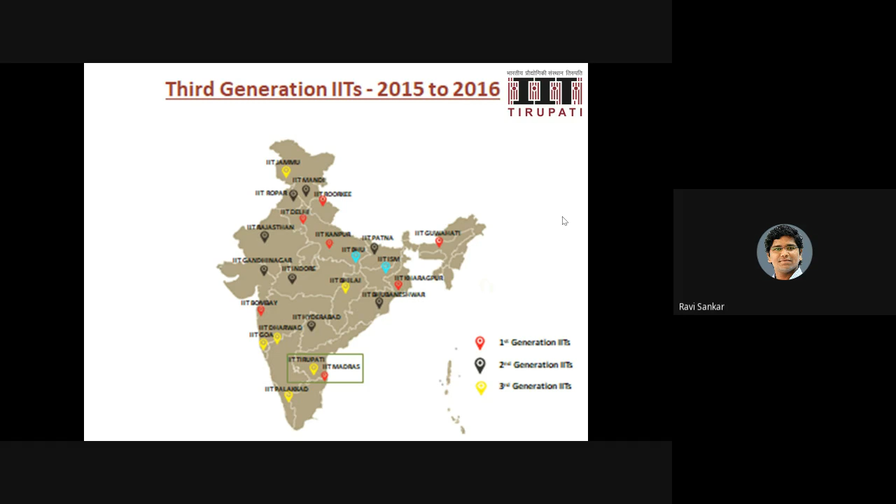Regarding the history and milestones of IIT Tirupati, the announcement of third generation IITs was given in 2014, and we started working from 2015. However, some of the third generation IITs started from 2016. So we are very fast, and we are growing very fast compared to even some of the second generation IITs.

What is the scale bar for it? For example, we now have nearly 100 faculty at IIT Tirupati, and we have approximately 75 to 80 projects. That shows the ratio of number of projects to faculty. If you take some other institutions, this ratio may be slightly less.

IIT Tirupati is mentored by IIT Madras, and IIT Madras follows MTech and MS. As you know, all IITs have BTech, MTech, and PhD. Apart from these, we also have MS by research, so those people who are interested in doing research can also enroll into the MS.

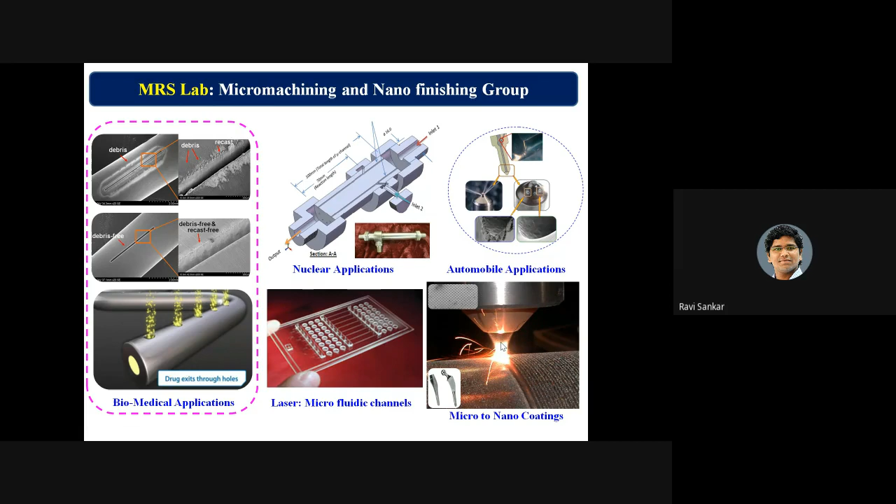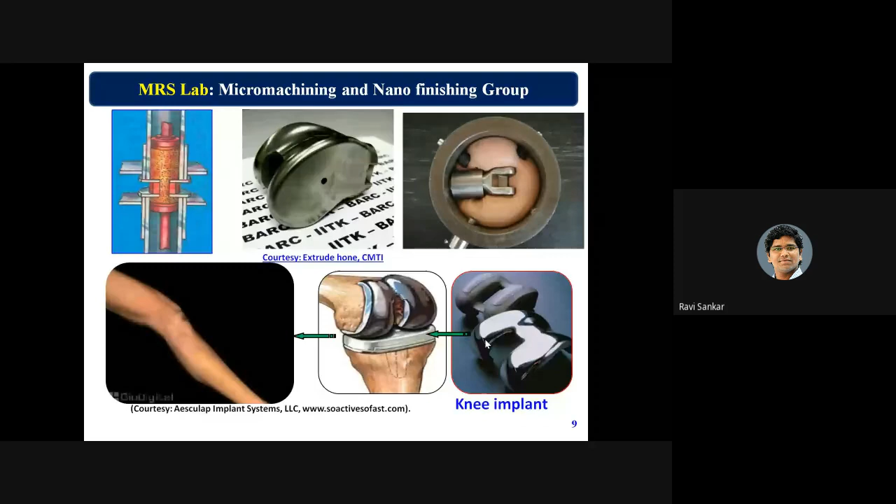I'm not going to talk much about finishing because my next lecture will cover finishing. These are some of the extra slides I'll explain in the next lecture.

Sustainable manufacturing group - let me give you a glimpse of what we do. The first glimpse shows how machining takes place conventionally. This is the one I started my research on - sustainable manufacturing, which I began in 2002 when I joined IIT Kanpur, approximately 20 years back. You can see the great potential it has.

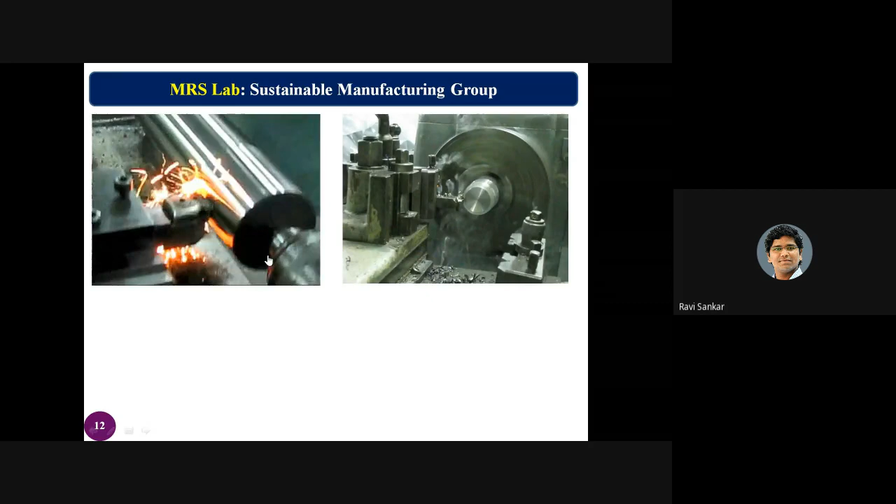So this is one of the problems - normally in colleges, people talk about thermal aspects of machining and the high temperatures generated during the machining process. To overcome these thermal aspects, there are two solutions. One solution people normally talk about is going for diamond cutting tools or ultra hard cutting tools, which is an expensive process for a country like India, because we always have to consider the economy.

For example, whenever we try to go to the shop to get a car or a bike or something, the first and foremost, the common man mentality, I can say that you just observe how much mileage it will give. So you don't look at what the safety features are. Nowadays, people are slightly more aware of other things.

In the past, or you can say still currently, some people think about how much mileage, because that is clearly evident from the advertisements in the newspaper. For example, they will write clearly, this particular car will give you 20 kilometers per liter. Why are they writing that? Because people want it. The people want to observe it.

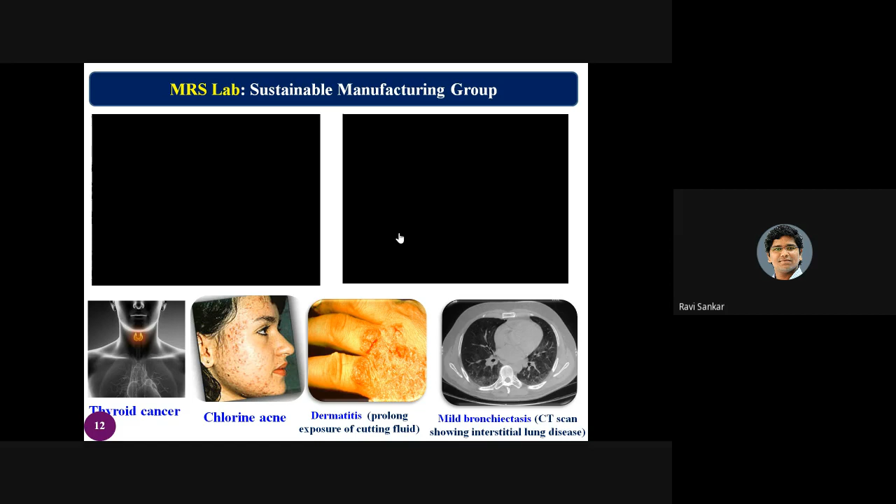So what are the diseases that will be caused? Chloracne, dermatitis, mild bronchiectasis, and other things. These are many things that it will cause. So what you have to understand here is what's needed.

What is the solution that our laboratory will provide? Our laboratory has multiple solutions. Currently, we try to do green cutting fluids and at the same time minimum quantity cutting fluid, as you all know. So we have different types of minimum quantity cutting fluids. Some of the things we develop on our own, some of the things which we can procure from abroad also.

And the most important thing that we try to do is develop sustainable cutting tools, and we also try to develop sustainable compositions for green cutting fluids. So we also provide services.

As you see, we also provide services, meaning some people nowadays slowly send requests through the proper channel only. The request is, sir, can we get cutting fluids? It is all about patented technologies and other things. We are ready to supply to the people. We don't have issues, because some mails are coming from some universities in Andhra Pradesh and other states also. So what I mean to say is that we are ready to supply, but through the proper channel. We have to take appropriate permissions from our institute, and we can supply to you also.

Because people want SCI publications and other things, what they think is that if they may have chances to get the green cutting fluids, they can understand the emissions and other things, and we can also provide some data. For example, what this cutting fluid emits and other things also. So people try to approach us officially as well.

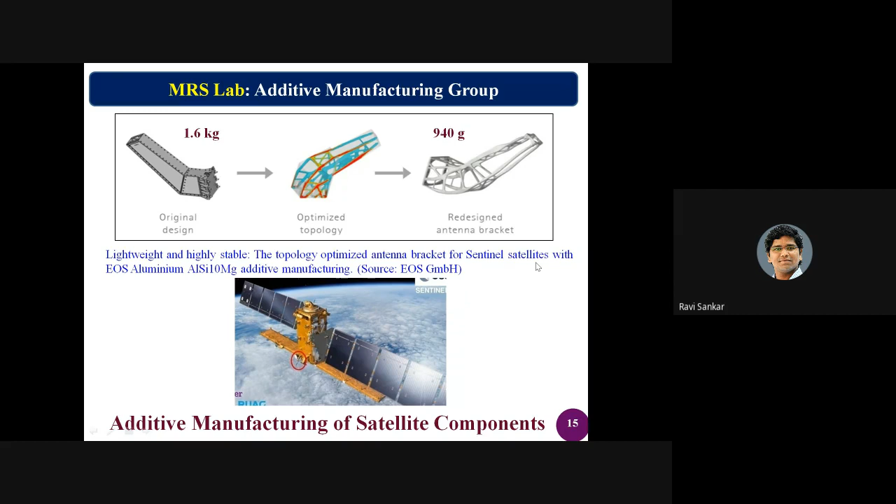Your 3D printing should not work if you haven't checked what is a viable solution. Whenever you want to get some components 3D printed, these are very expensive. A simple plate, 10 centimeter by 10 centimeter, the minimum charge will be 10,000 rupees. The same thing by normal conventional manufacturing route, you can get for 1,000 rupees. So you have to wisely decide which components you should make by additive manufacturing.

Second example is hydraulic manifolds. These have holes from all directions that must merge at certain positions and angles. This is very tricky because all the holes are internally joined, as you can see in the wireframe model, joined at different junctions and angles. Drilling the sides is not a problem, but joining at different angles like 45, 50, 70, 90 degrees is nearly impossible to fabricate conventionally. In that case, you can go for topological optimization based on functional requirements and develop a 3D printed component.

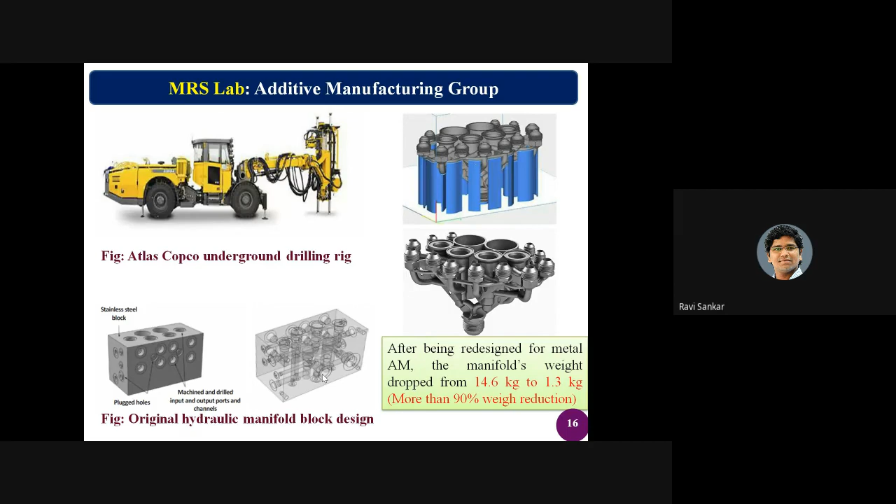A common hydraulic manifold will cost you around a few lakhs of rupees. With 3D printing, the burden on materials is reduced and the cost is also reduced. So you need to find solutions where you employ additive manufacturing.

One example: you can 3D print two structures, one solid and one a lattice structure. Why go for lattice structures? With lattice structures you can minimize material wastage. Both can be printed by 3D printing technologies. People are nowadays working on lattice structures, especially my group. There are a few PhD students working on lattice structures for biomedical applications, automobile applications, and many more.

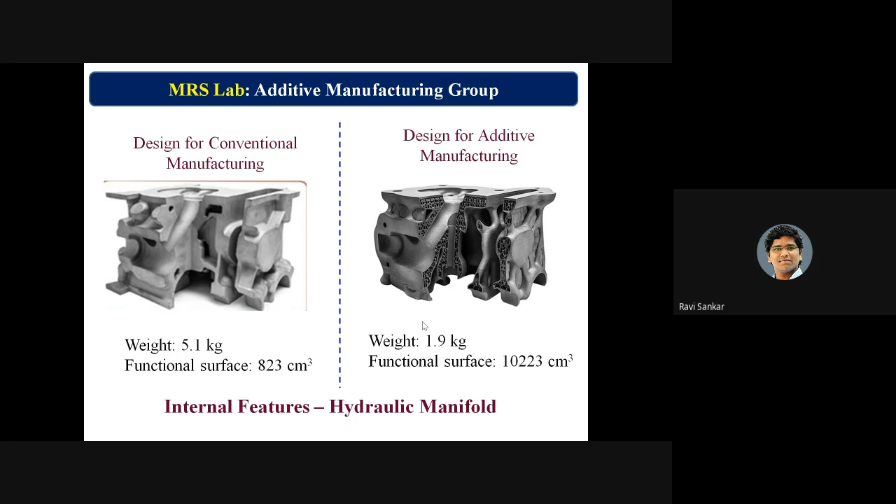Why do you want to save material? Because you have to save material for your children, grandchildren, and great grandchildren who will come after you and need materials to sustain. That's why sustainable manufacturing plays a crucial role in additive manufacturing also.

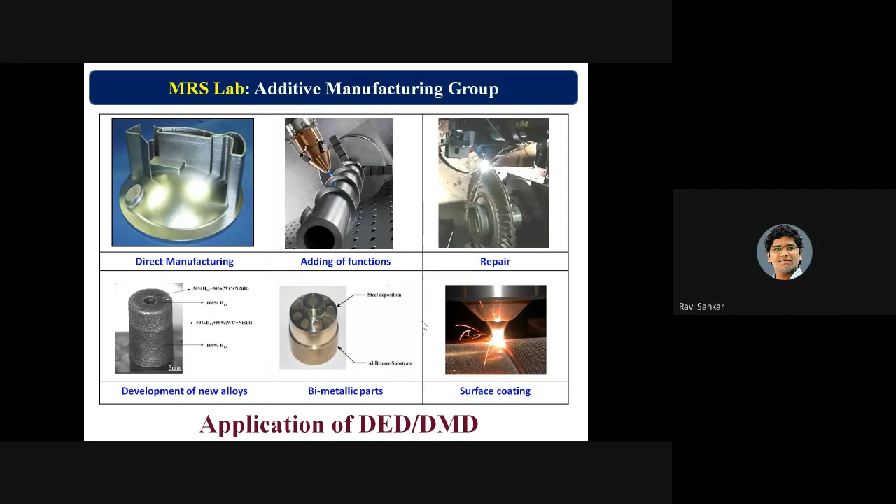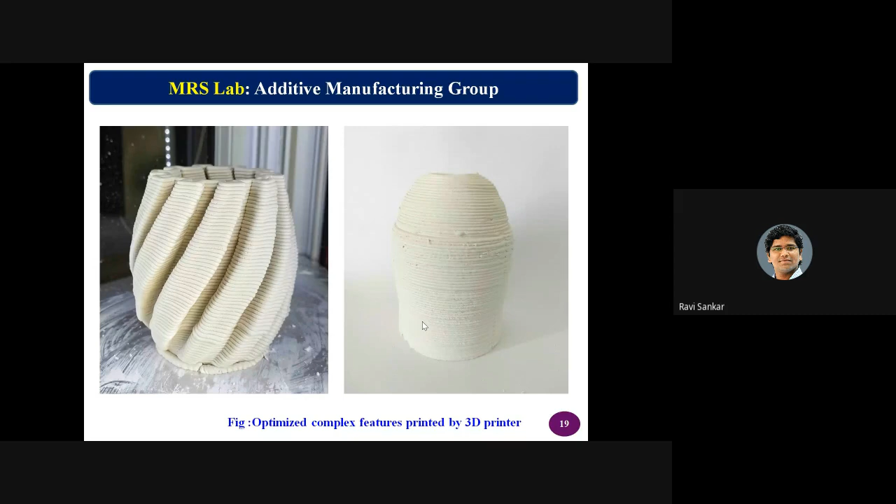Our collaborators and students who are working have all these types of facilities. Powder bed system, direct metal deposition, and other systems are there. We also have a process called ceramic 3D printing. You can see some beautiful structures we try to build using this. The only question is what type of ceramics can be used. Beautiful structures can be fabricated by ceramic 3D printing technologies at our laboratory.

If you want any support or anything, at this point of time we are not providing any other solutions.

One minute, I'm just getting an official call. Hello.

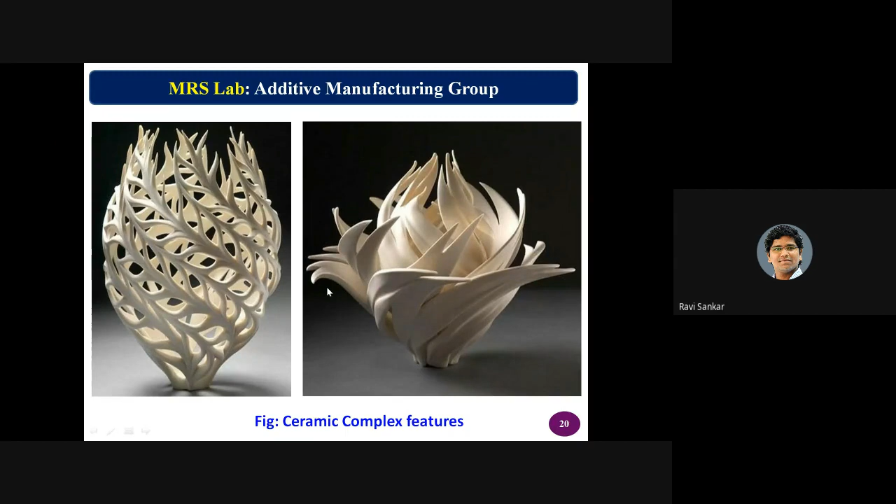So these type of structures we tried today. Now we are entering the area we're going to talk about today: the bio-nanomaterials and manufacturing group. We exclusively work on materials development as well as coating technologies, how these coating technologies work for us, and if not working, how we can overcome the problems and other things.

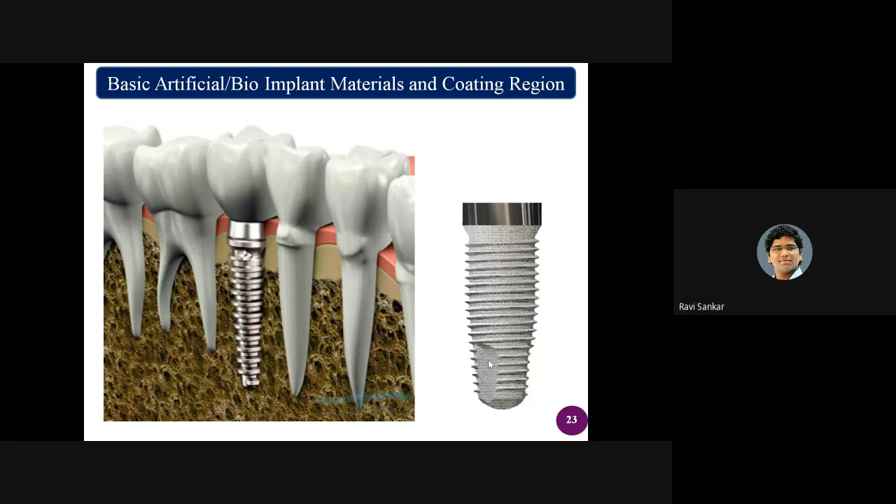So what people try to do is the coatings. These coatings help in osteoconduction as well as osteointegration. So what are these osteoconduction and osteointegration? If you understand the basics of these, then you can do proper coating. For this, you need to go for a porous coating. How do porous coatings look like?

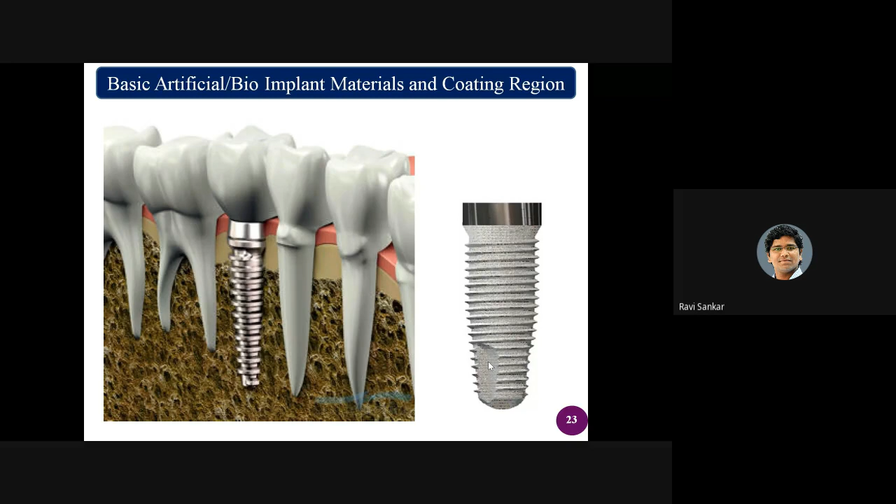For example, whenever implantation is going on into the mouth, first they drill it, then they try to rotate it, so it experiences the tribology, or shear force on top of it. Once you place it, as I was telling in the previous slide, you should have the conductivity of body fluids and bone generation and other things.

It has to conduct through the coating surface, that is called osteoconductivity. Osteoconductivity is the protein exchange, the mineral exchange taking place across the coatings. During this course of time, you need some layer development on top of it. These intermediate layers will integrate the bone and the coating surface together, that is called osteointegration.

For which, how the coatings look like, you just see here. The coatings look like this. You should have a solid coating, an interacting coating, and as you grow across the coating, it has to open up, because it has to have as many pores as possible. Once you have the coatings with high amount of...

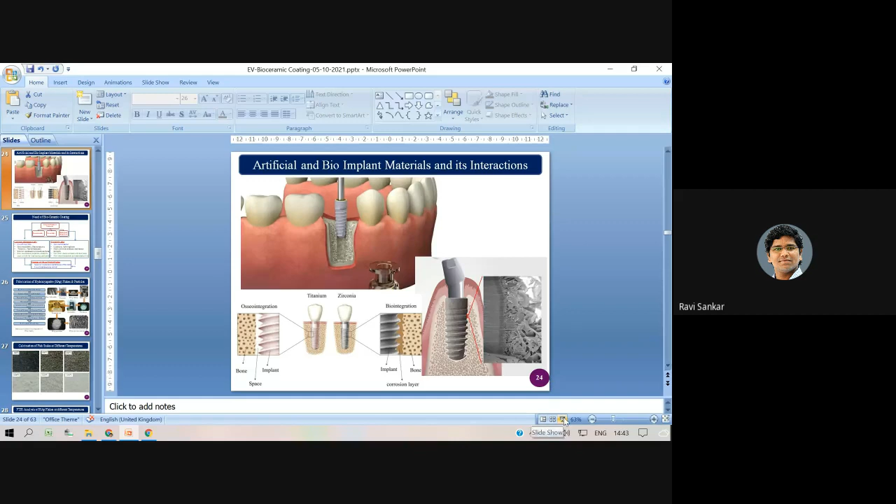So osteointegration, as I said, whenever you have a porous type structure, fluids pass through this. Whenever fluids pass through, it has to generate a third layer, that is the integral part of the mineral layer, protein layer, and vitamin layer, whatever the layers are. These layers are called, in osteo terms, the apatite layer. Those layers will form on this and join the body along with the crown. This is called osteointegration, so for osteointegration, the best choice is proper osteoconductivity.

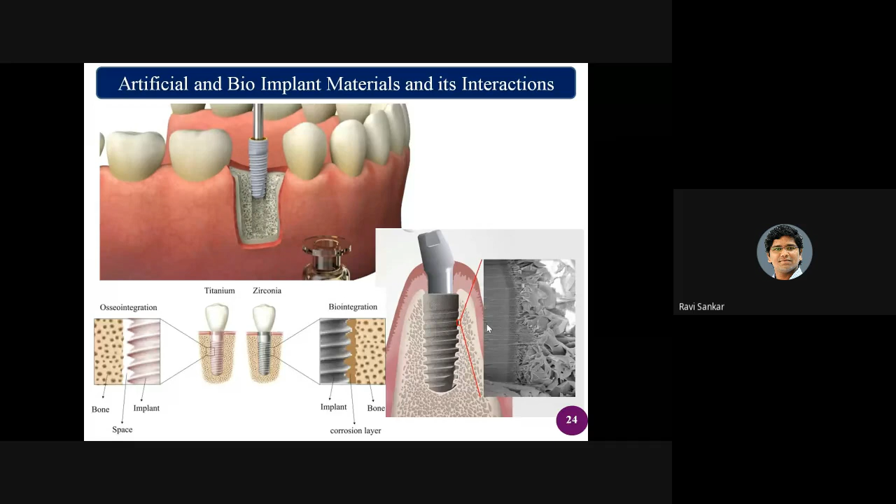Some people also use zirconia based implants and other things. Now we move on.

First and foremost, whenever you want to coat, what do you want to coat and why do you want to coat? Is your coating material good? That question comes next. So what do I want to coat? I want to coat calcium phosphate. For example, your bones, dental implants and other things, everything will have calcium and phosphate. This calcium phosphate is Ca10(PO4)6(OH)2, that is hydroxyapatite, which is one of the bone materials, or artificial bone material.

Now I want to coat this. You may have a doubt, why sir, why do you want to coat? Directly you can make an implant. The basic problem is it has poor mechanical properties and other things.

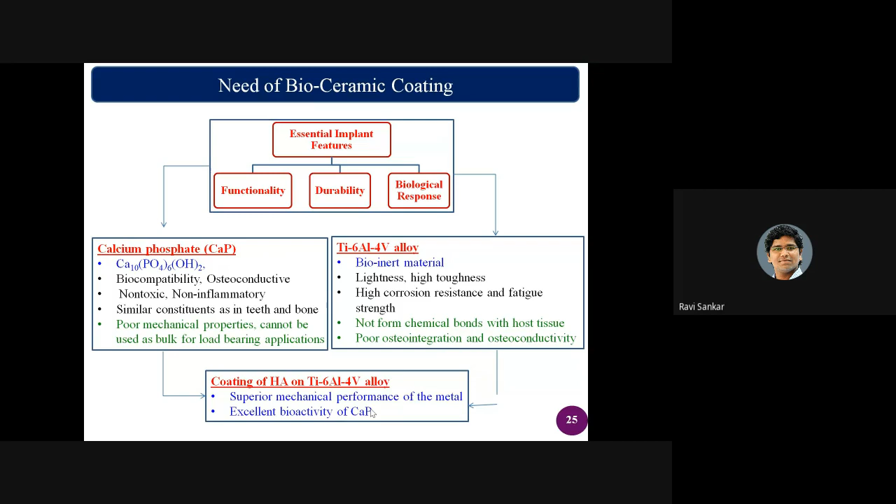Okay, so now the question comes whether the material that I'm developing is good or not. So for that purpose, how do you fabricate the bioactive glass or hydroxyapatite, or the biomaterial that you are talking about.

Since this particular work started in 2012, at that time I was in IIT Guwahati. IIT Guwahati comes in the region of Northeast, where people take an abundant amount of fish. So fish scales are abundantly available and free of cost. So we can take the fish scales.

Fish scales contain an abundant amount of calcium and phosphate. In that circumstance, what we try to do is extract that. Fish scales also contain some protein, but that protein is entirely different from what humans require. That's why you need to do deproteinization, or remove the proteins and other things.

That's why what we have done is acidic deproteinization followed by basic deproteinization, then we have gone for the calcination process. Once you do the calcination process, you get flakes of hydroxyapatite. Then you can go for ball milling applications and get the particle size as per your requirement. If you are looking at normal, small institute level, up to microparticles is okay.

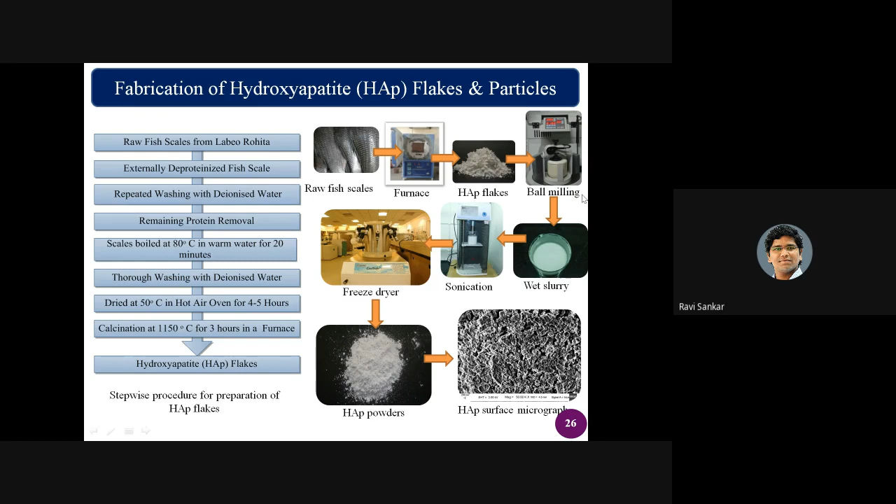So once you get that, you need to start characterizing whether you received a good material from the manufacturing process or a production process or not. That is a million dollar question to ask about.

For example, if you are calcinating at 700 degrees - so what we have done is we have done from 700 degrees to 1400 degrees. Since we have less space, we are showing you only some here.

From the images, it is very difficult to predict whether this material is good or not - just for your qualitative understanding, we are not telling you quantitatively, we just wish to tell you which is good or which is not good. For example, if you see 700 and 800, you need not do high level characterizations like XRD, FTIR and other things, because by default from the visual inspection itself, you can understand that this is not good, obviously. So you can avoid some of the things.

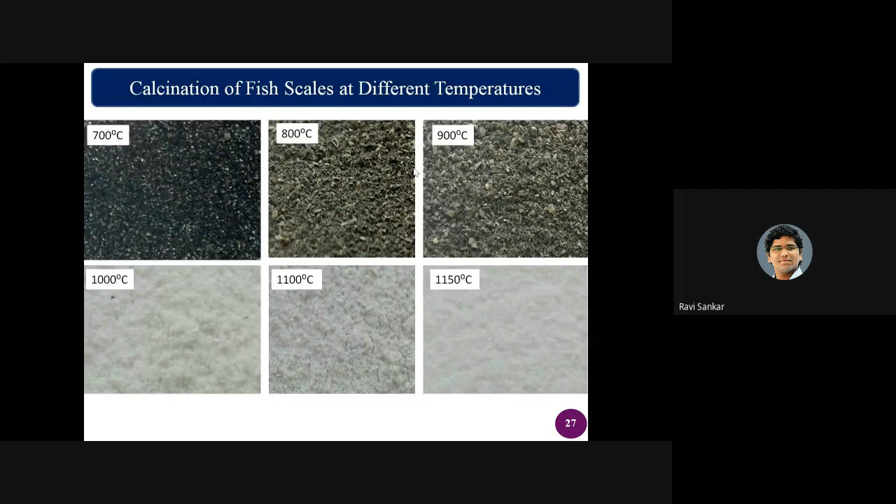For example, the first and foremost thing you can do is go for FTIR analysis, Fourier transform infrared spectroscopy - it is one of the IR technologies. So for FTIR, one curve, I am just going to explain at 1250 degrees. As you can see here, a lot of things are there where you can see OH bonds, PO bonds, and CO bonds - calcium, phosphate, and OH bonds and other things are predominantly available.

Now, we are going to do this at different temperatures, for example, 800 degrees to 1400 degrees.

So it will show you what are the compositions and bonds available in the materials. This is one type of characterization to understand whether the material has proper bonds, whether PO bonds are there, so phosphate is there, calcium is there or not, and other things.

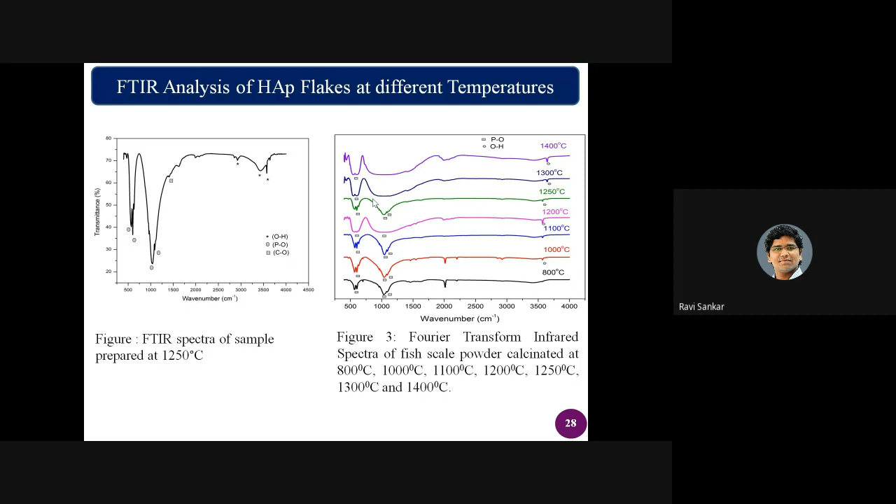Apart from it, you also have to go for XRD analysis, where you can see different 2 thetas. You all know Bragg's law, n lambda equal to 2d sine theta, where 2 theta will be on the x-axis, and it will give you some of the Bragg's peaks and other things, where you can see tetracalcium phosphate, beta tricalcium phosphate, and other things at different positions.

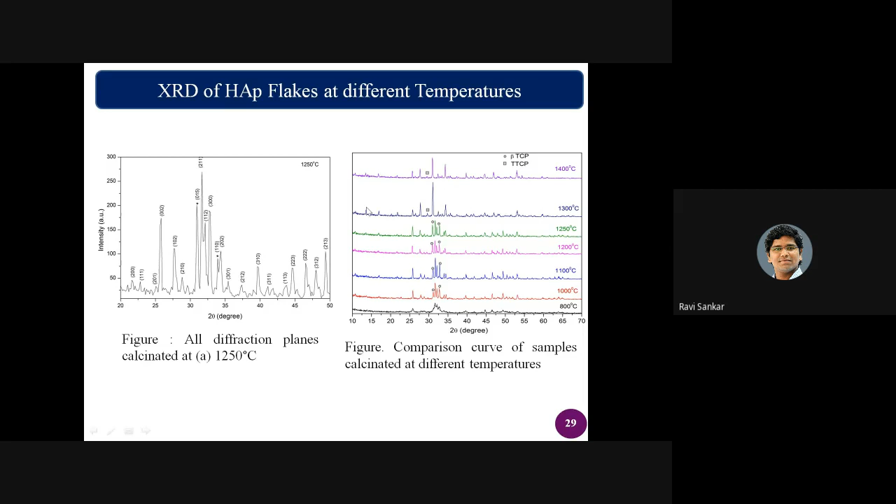So once you understand these two, you also have to understand in terms of ball milling time. Whatever you are doing from a fish scale after making hydroxyapatite, you need to do ball milling with respect to number of time. If you are doing a ball milling operation, there will be contamination because balls are there, bowls are there and other things.

So you need to do it again with respect to different ball milling time, like 2 hours to 9 hours, and at the same time XRD also. Now you have a big data set. I have powders, so these powders have this type of characterization and other things.

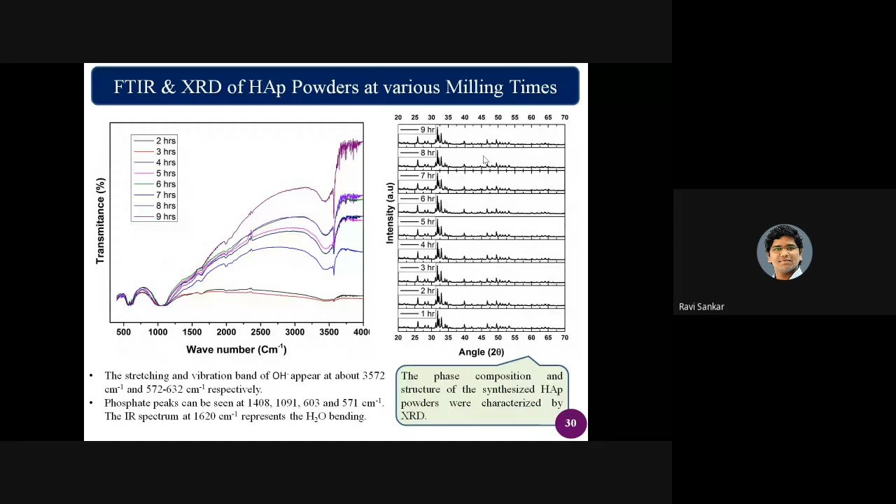Now, which is good for me, whether the 2 hours is good or calcination temperature 1150 is good - that is what you need to understand. So in our case, normally what we got is 1250 and 1200 approximately gave the good results.

Once we got the good results, we have to understand the purity of the material. For example, if I want to understand the purity of the material, there is a standard pattern you can use, which is JCPDS in the XRD library.

For JCPDS, you will have a standard curve. For example, for hydroxyapatite, you will have a standard curve. On the standard curve, you need to superimpose your data. So for example, my 1250 degrees, which is giving me good results, I am superimposing.

So whatever the blue one that we got is from our material. Once you remove the base, you try to superimpose this. So you have two methods.

One is the peak intensity method, from which you can guess qualitatively what is the purity of the material, whether it is 99% pure, or whether it is 90% pure, or 60% pure or something. Since it is a biomaterial, you should always try to make it 99.2 or 99.5 and above.

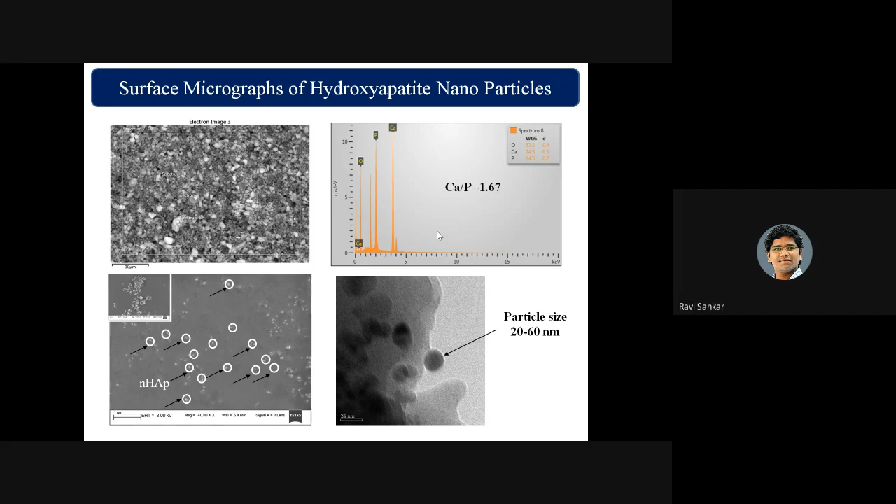As you go towards the nano scale, what is the advantage you get? Your surface area will increase. At the same time, whenever you go for nanoparticles, from 360 down to 20 to 60 or something, the calcium to phosphate ratio is slightly better. I can say 1.67 is normally what a healthy human will have. So we are on par with respect to purity as well as the quality of the materials.

We used to have one professor, Professor Rajendran. He used to tell us, if you have wheat flour, you can make chapati, puri, dosa, whatever you want, samosa, chilla, or anything, pakodi also you can make. So now I have a recipe with us, so I can play.

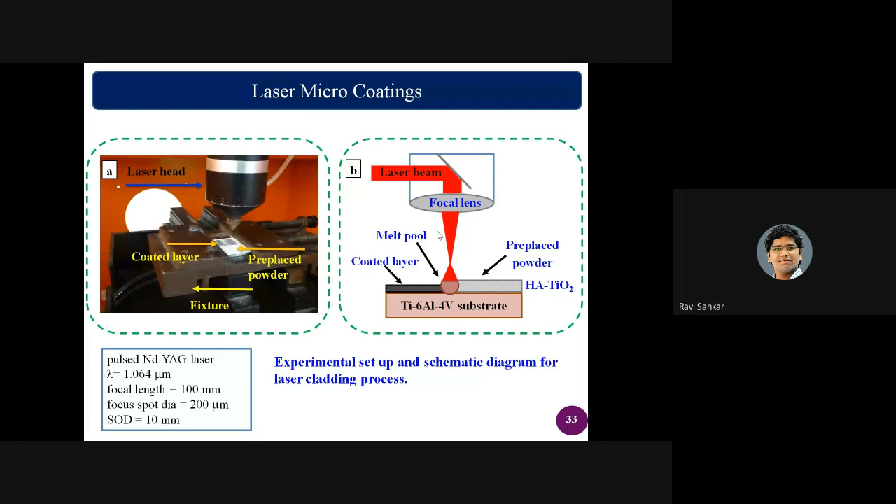Once I bake these particular powders, being a mechanical engineer with a laser micro manufacturing setup, what we try to do is go for laser coatings. The biggest advantage of laser coatings is you can coat 200 to 300 microns in seconds, or in less than a minute. That is the basic advantage of laser coating technology.

Now you can see here how the laser coatings look like. For example, fluence is nothing but laser power per unit area. If your power is less, improper cladding or coating will take place. If you gradually increase it, what will happen? If you go too high, there will be micro cracks and other things, because you are coating on a material which is an alloy, and your coating material is a ceramic, which is completely different. This plays a crucial role because the thermal coefficient of expansion of the two materials will be different.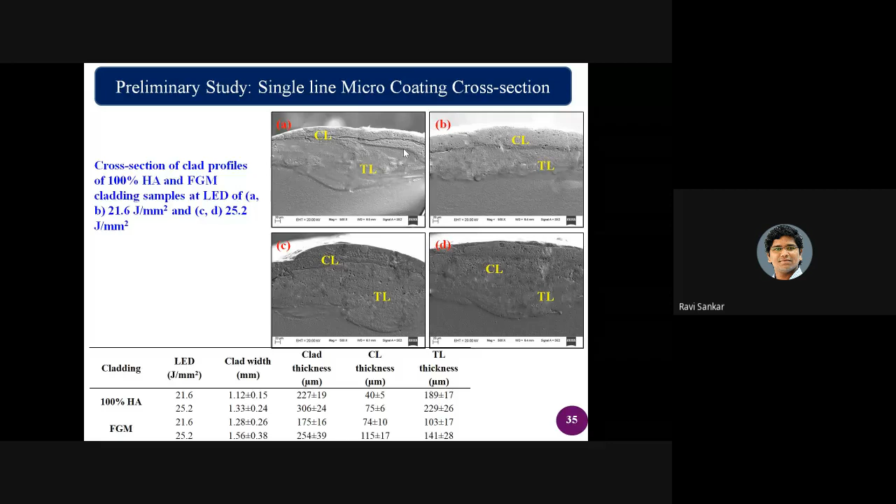Normally the transition layer is very good in terms of titanium, because titanium has two big problems. One, it is a poor conductor of temperature, or heat. Second, it is a highly reactive material. So if it is a poor conductor of heat, what will happen? The heat stays on the surface itself, meaning the coating material on top will mingle for a large cross section. Once you understand that, you have to understand the microstructures at the coated layer, at the interface layer, and other things.

You can see here how the dendritic structures are formed on functionally graded materials and other things. Now you can see, we not only understand about the surface morphology.

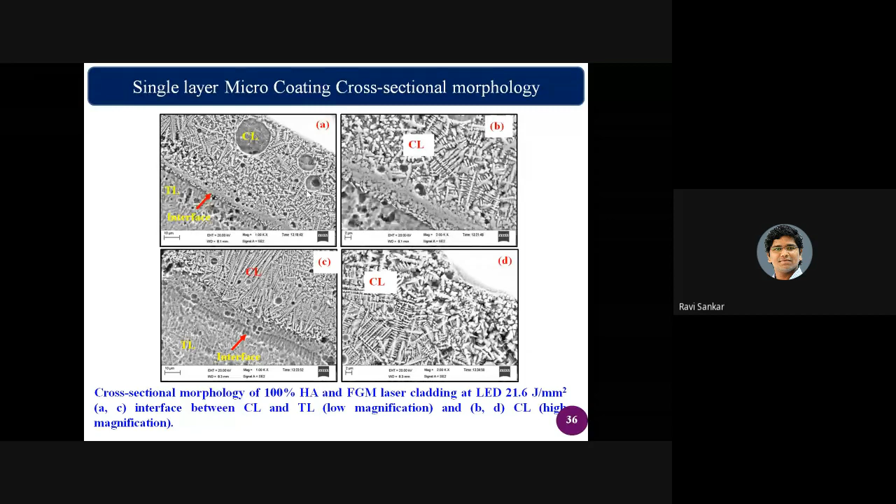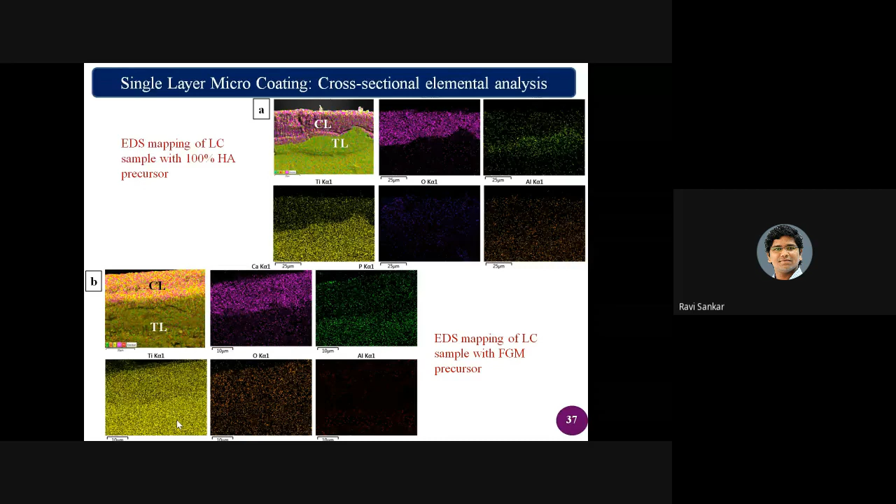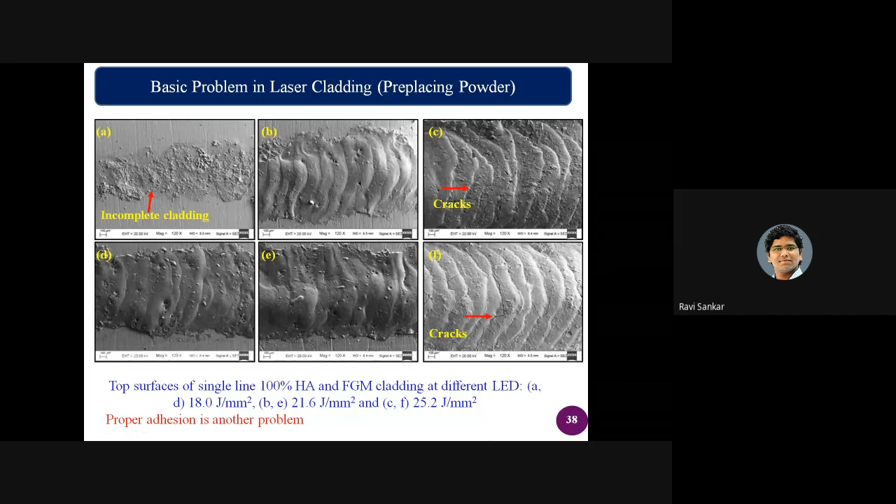To overcome this, we have moved to another technology called physical vapor deposition. So how does physical vapor deposition work? This is completely a physical vapor deposition technique where we take only the topmost layer. We can check this chamber. The chamber will have two things: apart from gas, plasma and other things, one target as well as one substrate will be there. The target is the material that you need to coat.

For example, here I want to coat titanium with hydroxyapatite. I have to make a hydroxyapatite disc, from where the bombardment of a rain of particles will fall like this, and you can get the coating.

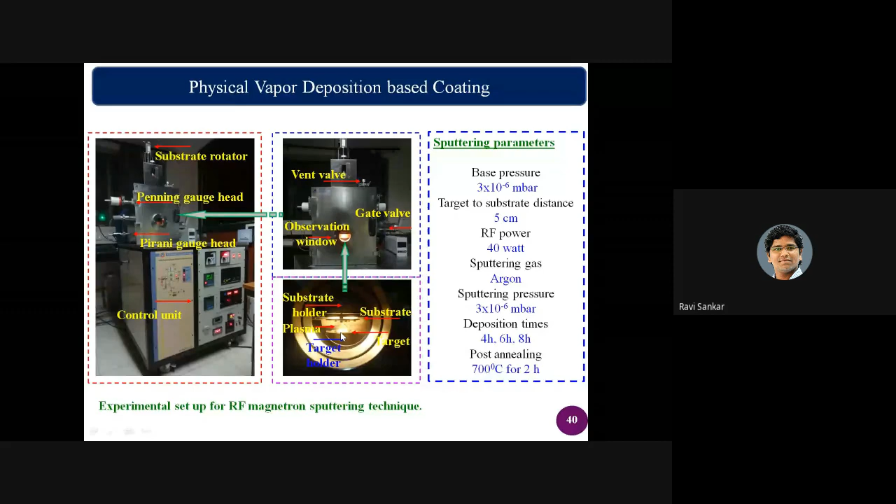So what about functionally graded coatings here? One of the drawbacks of titanium, already explained, is that it is a highly reactive material. Whenever it is exposed to atmospheric conditions, it will oxidize itself.

But whether it is perfectly 100% coated or not, how do you check? For that purpose, we assumed the coating may be improper, so we first coated with titanium oxide, which is 100% perfectly coated. Then 25% hydroxyapatite and 75% titanium oxide. You just have to make the disc according to it, then 50-50, then 75 and 25, then 100% hydroxyapatite.

So you have to gradually increase the hydroxyapatite percentage. The top hydroxyapatite layer will interact with body fluids and the outside environment like bone. The inner layer's main function is to hold and intact the complete coating layer. That is what the function is all about.

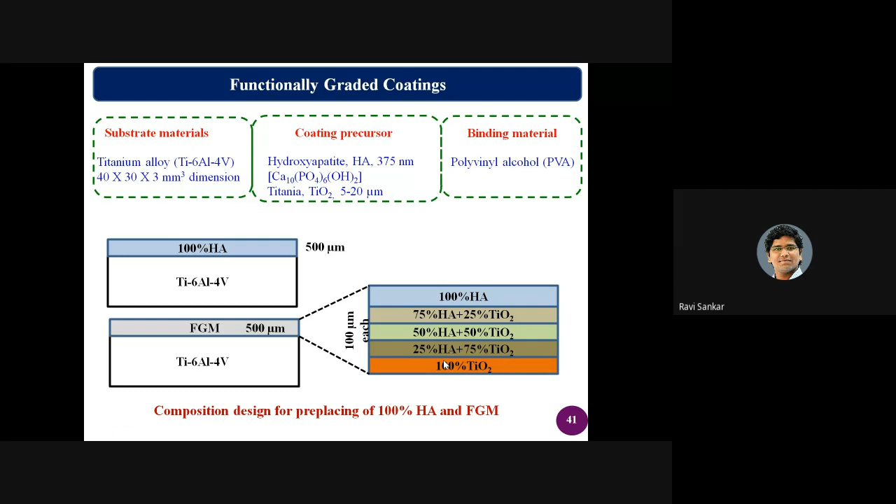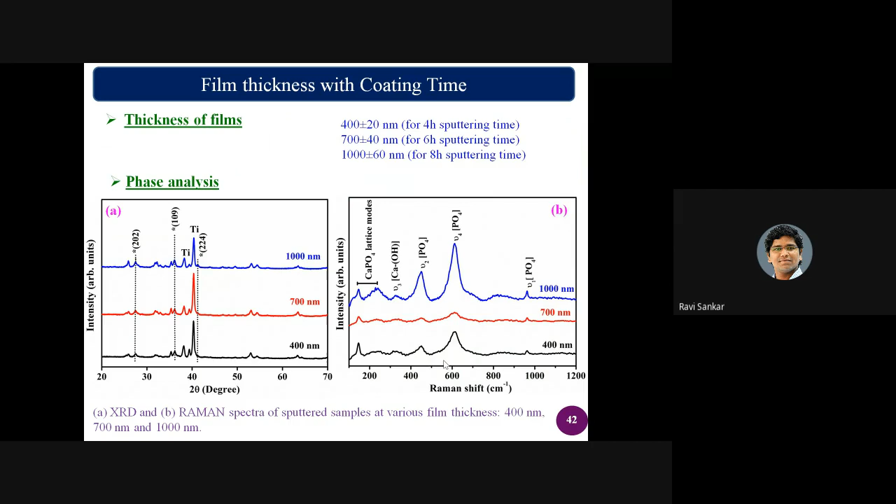We have also coated without any functional gradient, and in that case the porosity is not there. Porosity is nothing but scaffolding nature, and you need to have better scaffolding nature.

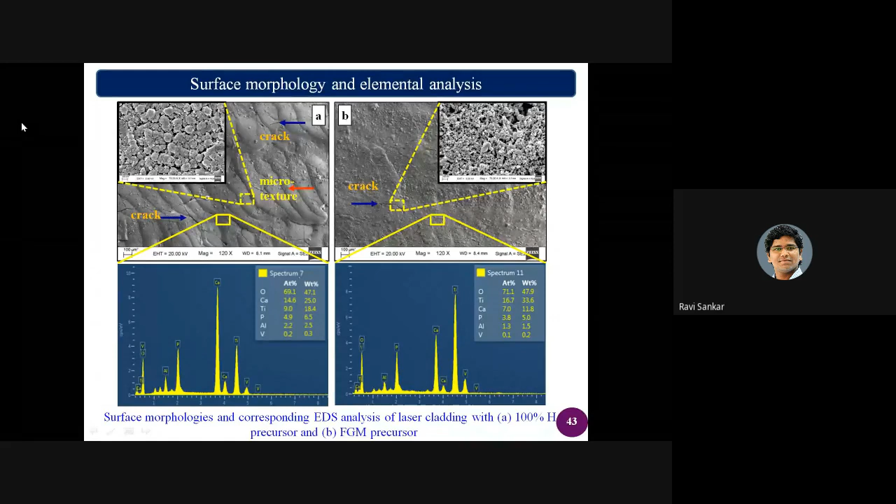Once you have all these things, being a mechanical engineer, you should be worried about whether these coatings will sustain. As seen in the earlier slides, the dental implant rotates, so it has to experience torque and shear force. To overcome that, there may indirectly be a delamination effect of the coating.

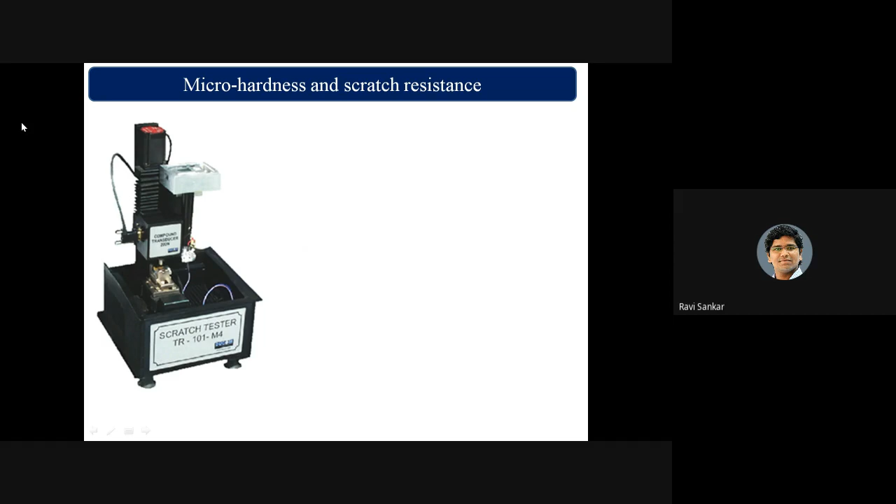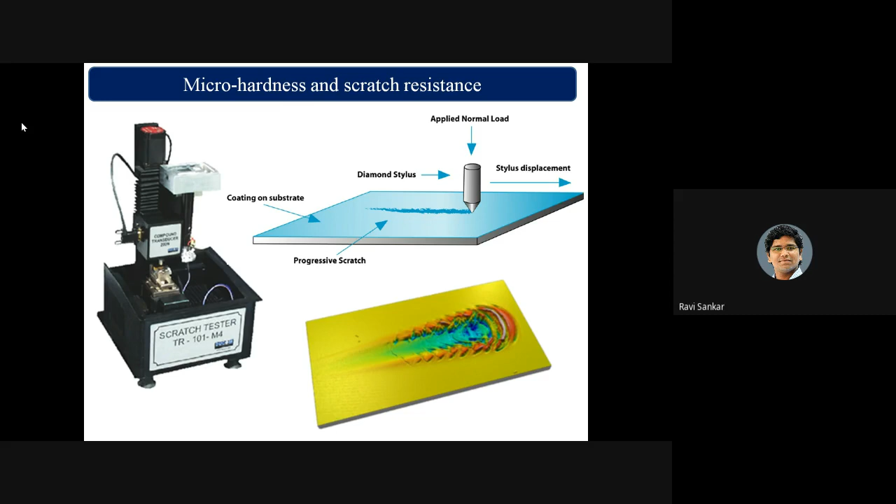You can change the speed with respect to every 2 or 3 centimeters. At the same time, you can also increase the load, for example from 1 kg to 2 kg to 3 kg. So now we have checked with respect to our materials, and you can see the results here.

Once you do the scratching on the coating, you can go for EDS analysis, energy dispersive spectroscopy, inside the scratch. If you get a composition dominated by calcium and phosphate, that means your coating is intact. But if instead you find titanium, aluminum and other elements, that means delamination has occurred.

So predominantly, as I said, delamination was evident, as you can see here. This delamination was very high, and there is a brittle fracture happening, which leads to particle generation. For example, if you put this into knee applications or other applications, it will leach out particles, which may cause micropollutants and other issues.

To overcome that— so delamination occurred, as you have seen here. Why did this delamination occur? You have to go back, scratch your head, and understand.

The basic fundamental mistake we made here is that we took a titanium or titanium alloy surface and coated directly on top of it. What is the disadvantage of this? The disadvantage is that you are constructing a house without any basement—you have not at all considered the basement.

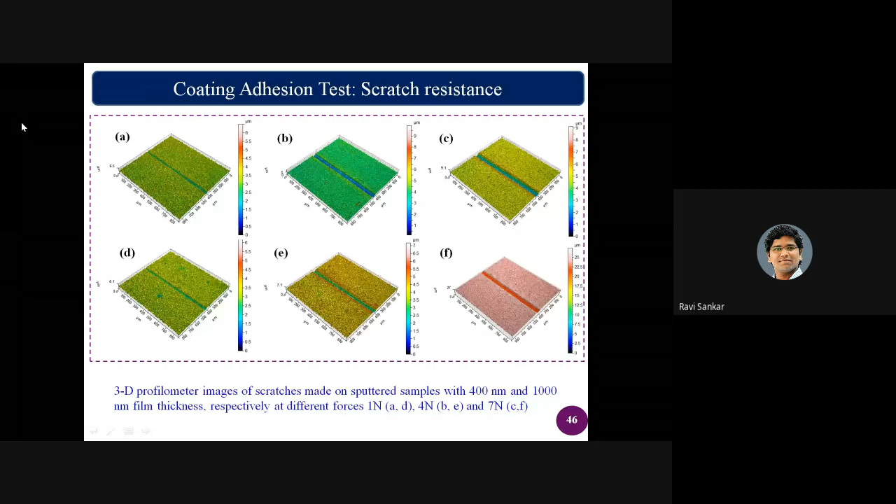Even though you have considered the functionally graded coatings, it is evident that you need to go for a basement. That means I need to construct the first basement, then go for construction of the house. So for that purpose, we have gone back to PVD, but our knowledge from the laser cladding or laser coating system helps here. How it helps, you see here.

Now, as I know, titanium is a very highly reactive material. Second, it doesn't conduct temperature as good conductors do. These are the two drawbacks. How can you convert these drawbacks into an advantage?

So you do the texturing on top of it. Since texturing involves temperature, and at the same time temperature won't conduct, you will have very good surfaces. For example, whatever texture you are forming, you will have an abundant amount of titanium oxide because it is highly reactive even at room temperature. If you do it at a slightly high temperature, what will happen?

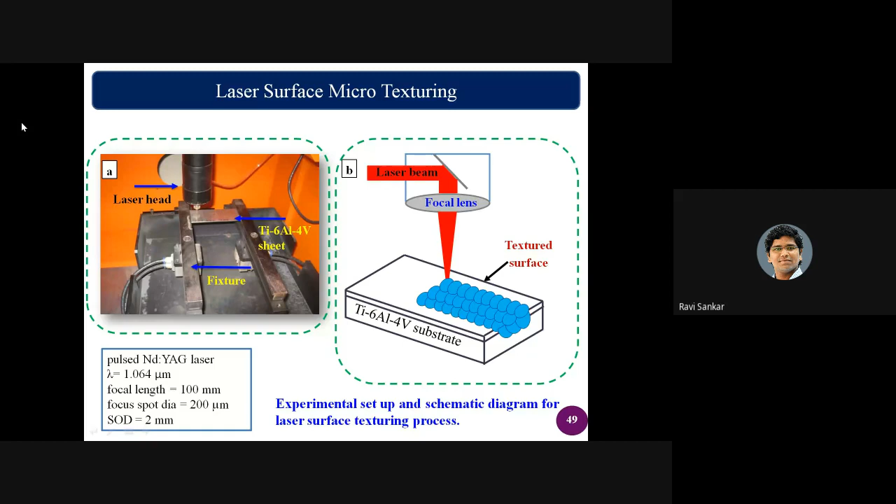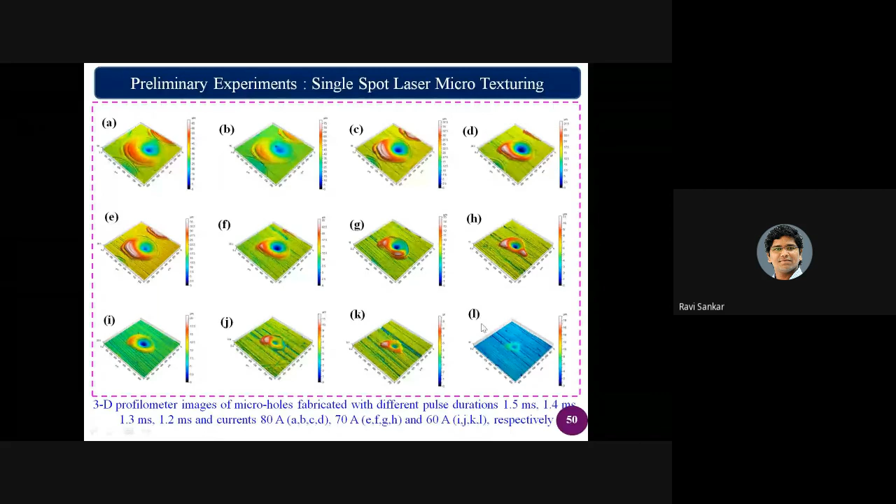You will get a perfectly titanium oxide layer. Once you get this, you have to understand how the molten material is taking place, how the textures are forming, and other things. Initially these were some of the problems we faced; later we overcame those problems. Once you do all those things, we have gone for texturing.

So the texturing, you can see here how it has happened, with different offsets: zero beam overlapping, 25% beam overlapping, and 50%. As you can all see, the surfaces predominantly give you some super hydrophilic surfaces and other things.

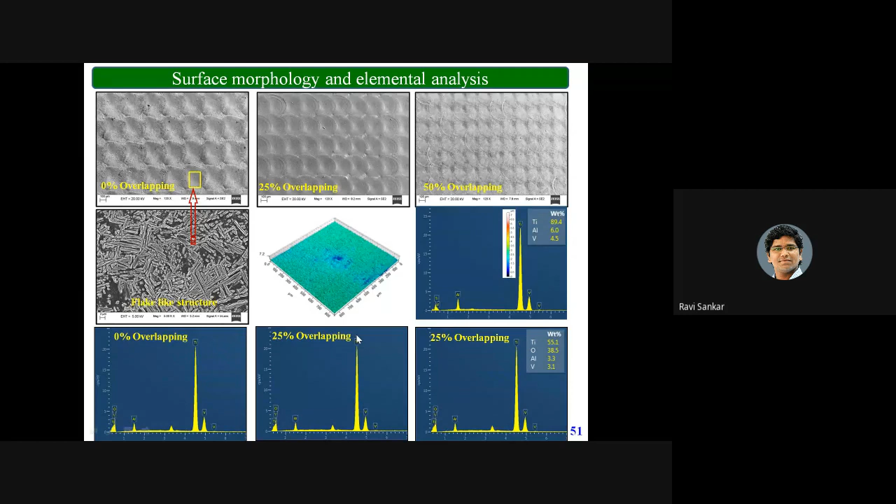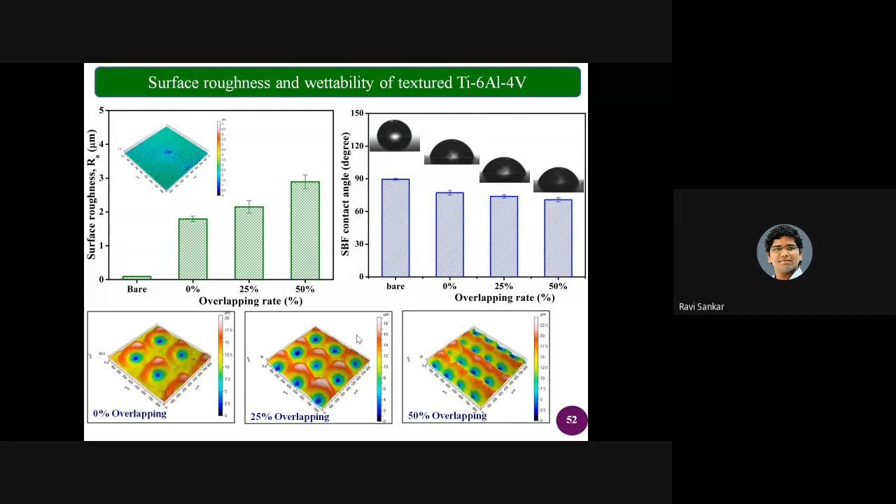So is there any metallurgical change and other things? What we have abundantly seen is that oxide film formation is predominant. Once you do the texturing, you have to convince the community whether the surface generated is hydrophilic or hydrophobic. We want a hydrophilic surface because you need proper adhesion. For that purpose, contact angle measurement was done, and we have shown that this material, after coating and texturing, is a hydrophilic surface.

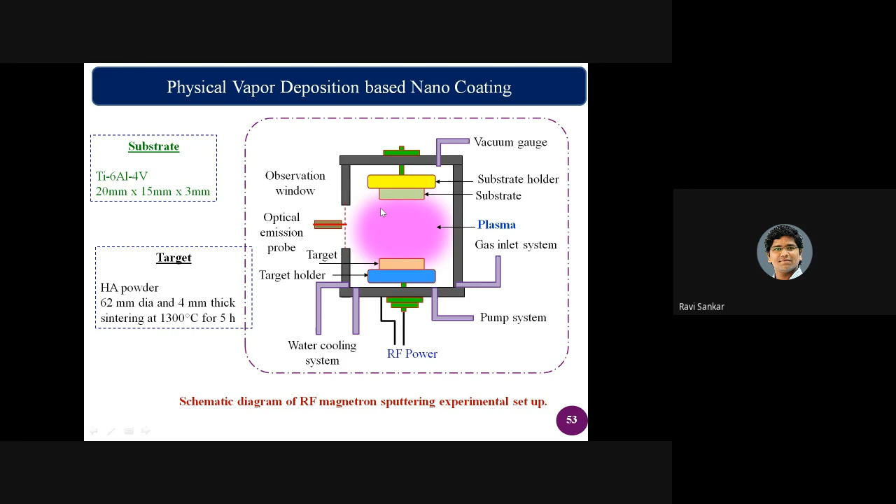Once you achieve hydrophilic surfaces, you transfer this to the functionally graded coatings, which again uses the same setup as PVD, but in schematic mode where the target is there and at the same time the substrate is there. The substrate gets coated by the target material on top of it.

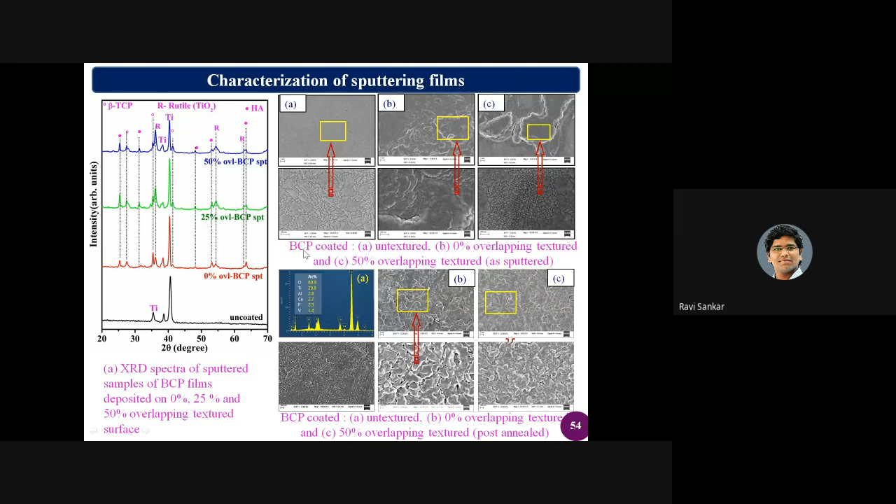So now you can see here how the coating has happened onto the surface. Not only the porous nature, but also the metallurgical aspects, how the peaks are evidently and cleanly seen onto the surface.

Once these coatings are successfully done, the second thing you have to do, being a mechanical engineer, is go for biological testing. So the first and foremost biological testing you need is to check whether this material is biocompatible or not. For that purpose, you can go for an in vitro biocompatibility test.

This is called the SBF test. SBF means simulated body fluid. So whatever body fluid you have in the body can be simulated at the laboratory scale, and this is used for testing these implant materials.

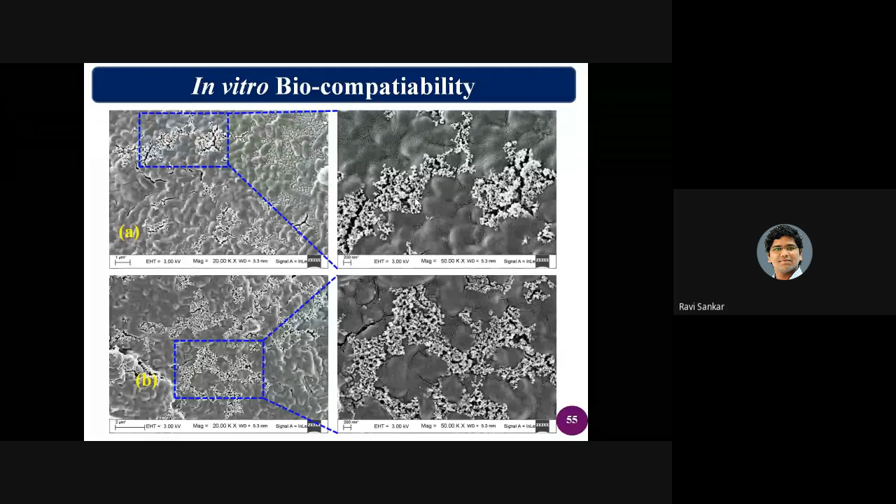Once you do this, you need to analyze in depth the apatite layer formation, because the apatite layer is purely a natural one, formed by virtue of interaction between both the artificial materials and the natural materials inside the body.

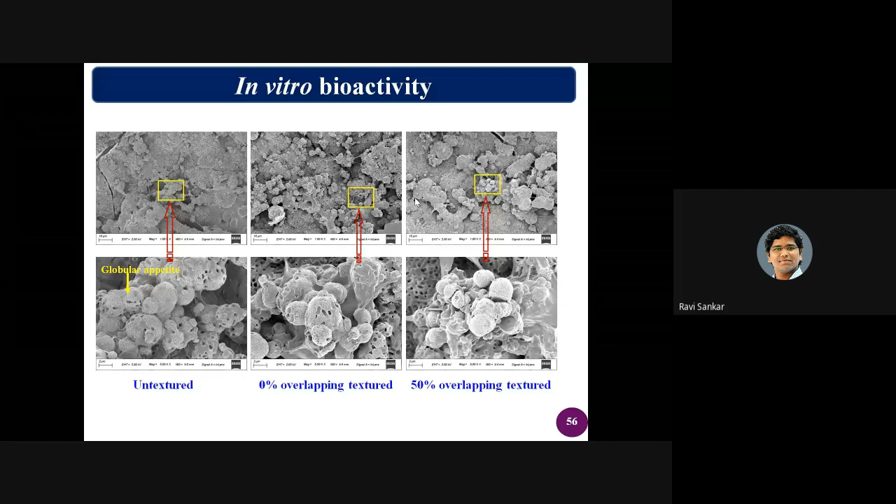Once you do all these things, the next step is cell culture analysis. In cell culture analysis, since this is particularly about orthopedic applications, people normally try to work with MG63 osteoblast cells.

So again, being a mechanical engineer, the first and foremost thing one can try is SEM analysis. SEM analysis won't give you clear-cut data, as is evident from this picture. You can see that cells are attached to the surface, but are these original cells or any foreign bodies like viruses and other things?

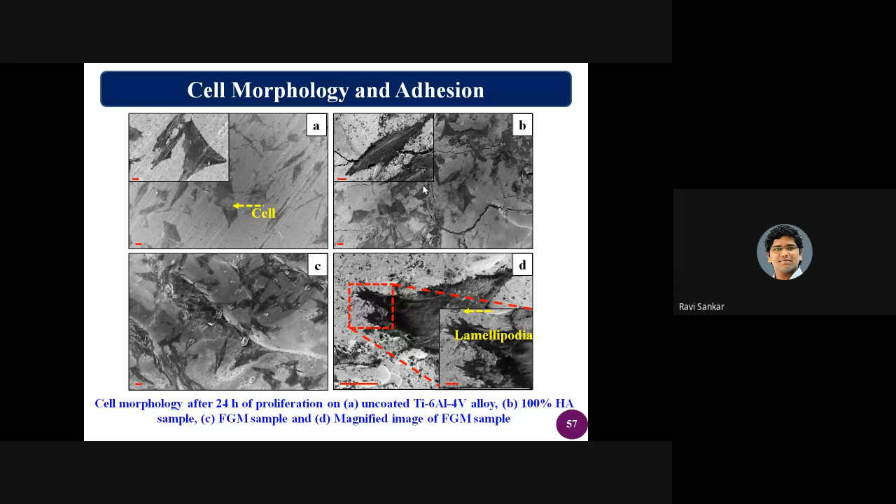The fluorescence microscopy uses certain liquids, called dyes, that you apply. One is a red dye, another is a green dye, given to the cells because of osteoblast compatibility. Since the red one is superimposed by the green, it appears orange. That's the only difference.

Using fluorescence microscopy, one can explain a minimum of three things. One is whether the cells are growing or not, evident from the microscopy. Second, whether any foreign elements are growing, for example any virus or bacteria growing along with it. Third, and most important, is the cell density - how much per unit area. In these circumstances, you can clearly measure the number of nuclei in each unit area, which gives you the density.

Apart from these three, you can also go for the pH test. If the pH is increasing from neutral - when we do the experiment, we try to keep it as neutral as possible.